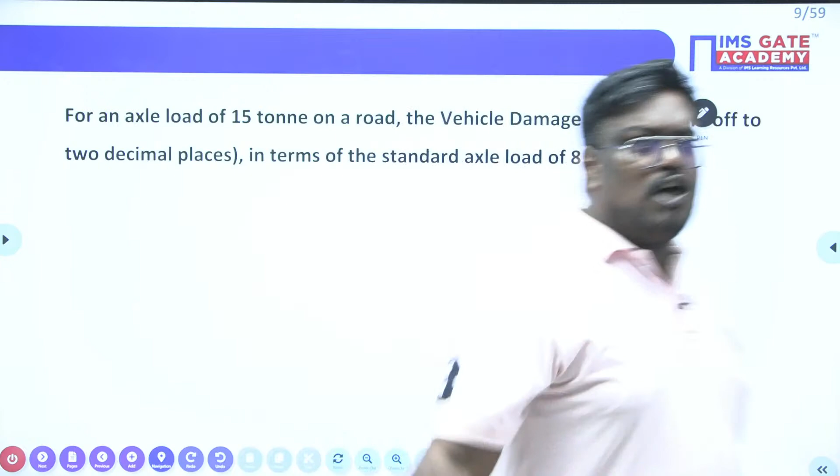Today's session will start with beautiful problems. Can you quickly read the question? For an axle load of 15 tons on a road, find the vehicle damage factor. This is regarding a vehicle's axle load, and they can ask you about this.

Good evening, sir. Nikhil sir is one of the good faculty, like Pragna sir is very good in fluid mechanics, and Nikhil Gaurav sir is very good in machines and measurements.

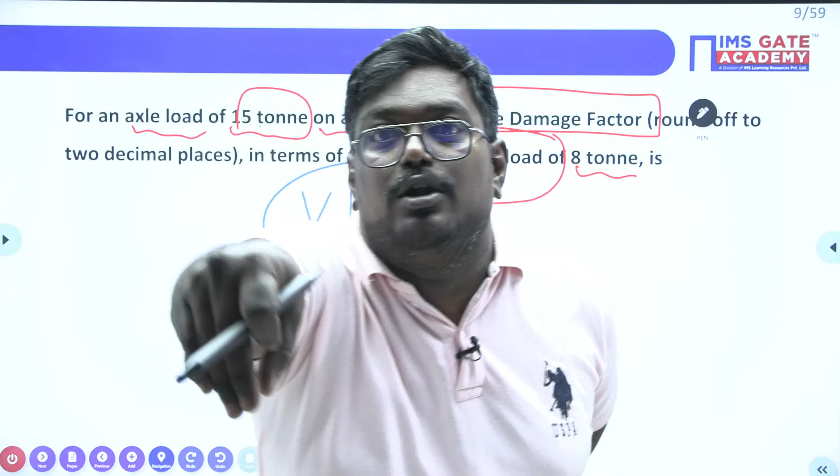Now we have VDF. What exactly is VDF? VDF is nothing but vehicle damage factor, in terms of a standard axle of 8 tons. You should understand what vehicle damage factor is: due to the axle load, how much it is going to impact the vehicle, that is the vehicle damage factor. It is evident from the question that the axle load is 15 tons.

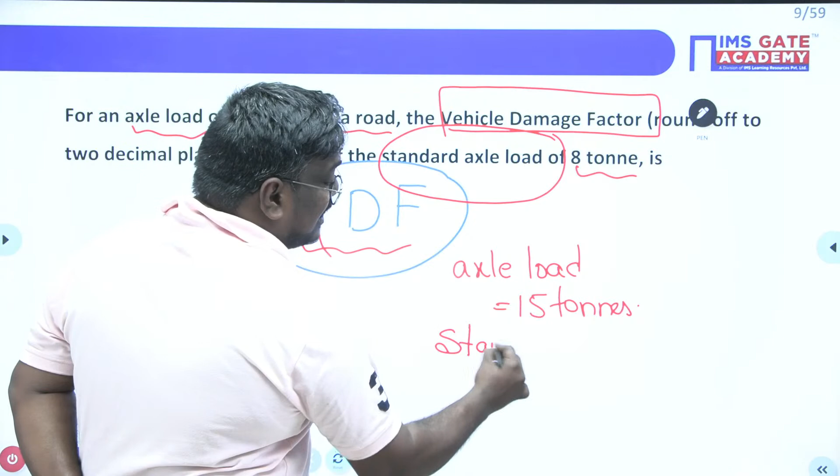Axle load is 15 tons. Now, my dear students, we also have a standard axle load. It is asking in terms of standard axle load, which is 8 tons. So, my dear students, it is asking the VDF. What is VDF? Vehicle damage factor. Very, very simple, my dear students. Can anyone tell me?

Thank you, Nikhil sir. Thank you.

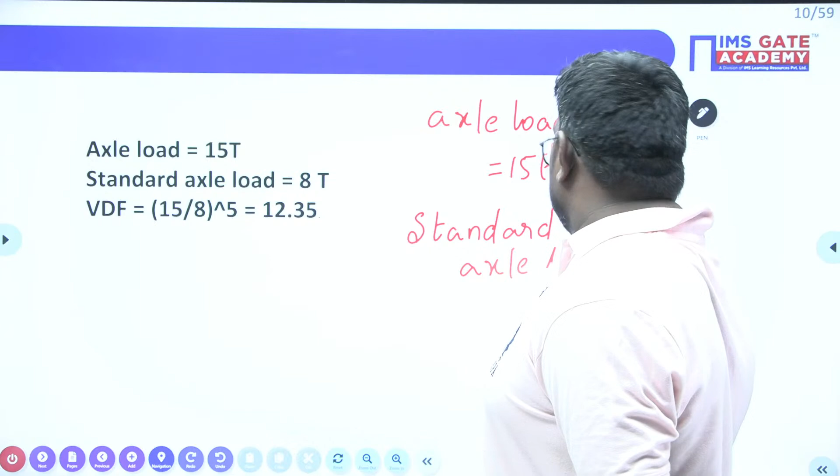Can anyone tell me, my dear students, what is vehicle damage factor? So, here it is clearly given, my dear students, axle load is how much? 15 tons. And what is the standard axle load, my dear students? Standard axle load is nothing but 8 tons. Now, my dear students, he is asking what is the vehicle damage factor?

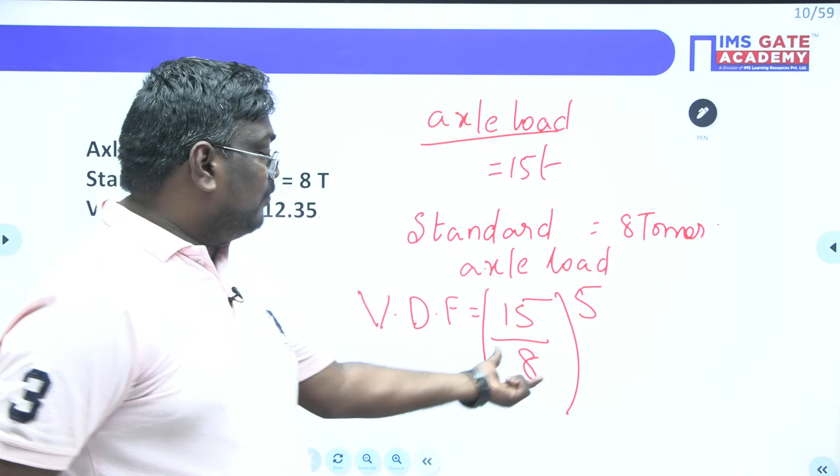Now, vehicle damage factor is given by the formula: axle load, 15 tons, divided by standard axle load, whole power 5. See, my dear students, what is the power? 15 by 8 whole power 5. It will be roughly 12.35. You have to remember that vehicle damage factor is nothing but axle load divided by the standard axle load whole power 5. That is a simple question, my dear students.

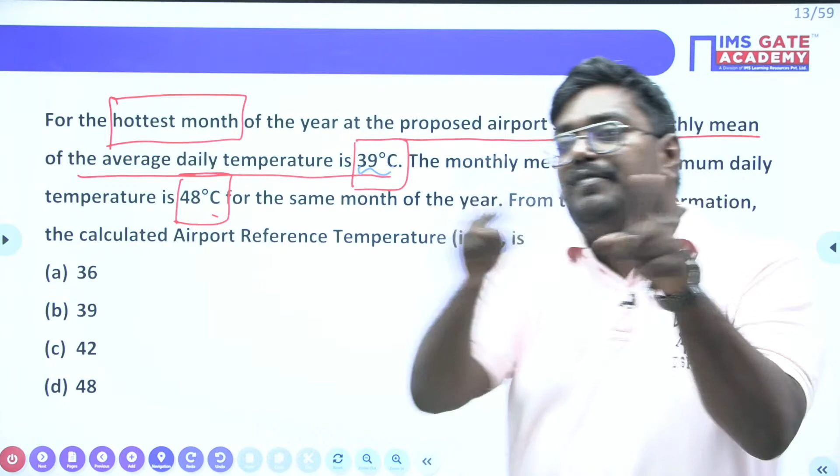He is saying monthly mean, so he is taking the average of the daily temperature, and on top of it the monthly mean. So he has given 39 degrees. The monthly mean of the maximum daily temperature, this is the maximum, my dear students. This is mean, and this is monthly mean of maximum. A lot of difference is there. One is maximum, another one is mean of average.

From the given information, what is the calculated airport reference temperature? Can anyone quickly answer me, my dear students? See here, I would like to tell you very important things. They want to understand what the reference temperature at the airport should be based on the mean of the monthly average temperatures and the mean of the monthly maximum temperatures.

Whenever they have done this kind of stuff, we have a beautiful formula. Please write down, my dear students. Airport reference temperature = Ta + (Tm - Ta)/3. Now you will ask me, sir, what is A? A is the mean of average daily temperature. Similarly, what is M? M is the maximum daily temperature. Is it clear, my dear students?

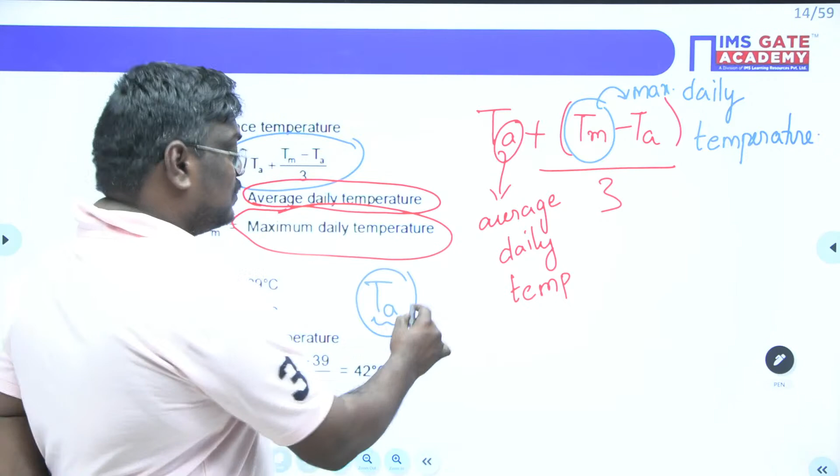So here, Ta is the average daily temperature and Tm is the maximum daily temperature. The formula is very important. How to remember? Maximum will always be more, so you cannot add maximum plus something. Take the average, find the difference between the maximum and average, divide by 3, and add it to get the airport reference temperature. You are taking the average plus the difference between maximum and average upon 3.

Here, average will be less. Average is 39, maximum is 48. So 39 plus (48 minus 39) upon 3. 48 minus 39 is 9, 9 upon 3 is 3. So it will be 42 degrees. Am I clear, my dear students? Chandu, are you there? The answer here is 42 degrees.

Is it clear? Again, I would like to tell you, airport reference temperature is average plus maximum minus average upon 3. Simple formula, you will secure 2 marks in the GATE exam, my dear students. So this is how you have to solve the problem.

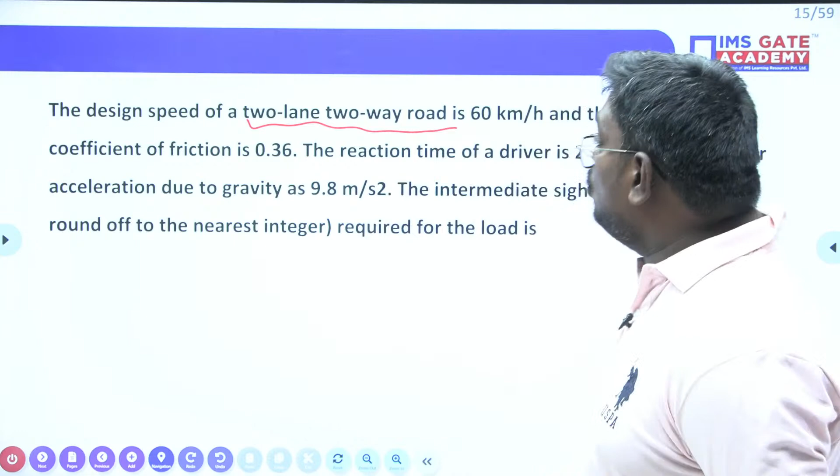Now, this is also a beautiful problem. The design speed of a 2-lane two-way road is 60 km per hour, and the longitudinal coefficient of friction is 0.36. The reaction time, I would like to tell you a very important thing. Remember, in case of stopping sight distance, the reaction time is 2.5 seconds. In case of stopping sight distance, the reaction time is how much? 2.5 seconds.

Am I correct, my dear students? If you can understand this, why I am telling, my dear students: luckily in the problem he has given it. If they ask you for OSD, what is the reaction time, my dear students? What is the reaction time? Anyone, my dear students, can you quickly answer?

It is 2 seconds. My dear students, I am telling you very frankly, to make the question tricky. These are the standard values as per IRC, Indian Roads Congress. You have to sometimes remember this value: 2.5 seconds in case of stopping sight distance and 2 seconds in case of overtaking sight distance. So, my dear students, the acceleration due to gravity is also 9.81 or 9.8 meter per second square.

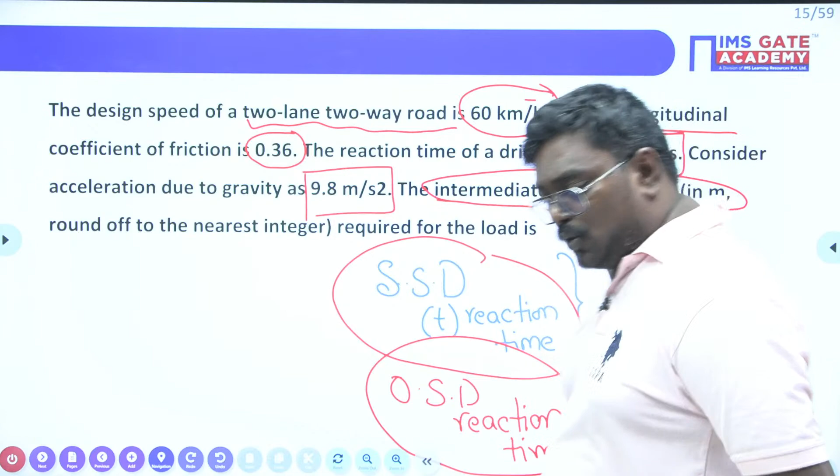Now, my dear students, he has asked what is the intermediate sight distance to the round off value. This is very important, my dear student. As I told you, stopping sight distance is defined as lag distance plus braking distance. What is BD? Braking distance. Am I clear, my dear students? Can you quickly answer me? Is this clear? Okay.

Okay. Suresh, now we have a question. They are asking, what is the intermediate sight distance? See, my dear students, here when they ask you whether it is a two-lane road or a one-way road, he is asking intermediate sight distance. So intermediate sight distance, you can write here, is equal to twice the stopping sight distance.

And remember, stopping sight distance can be taken as lag distance Vt plus V square upon 2gf. Okay? If gradient is given, plus or minus n is also added. So this is the formula for stopping sight distance. Is this clear? So one more thing I would like to add, my dear students. Here they have not asked SSD, they have asked ISD. So ISD is equal to twice the stopping sight distance.

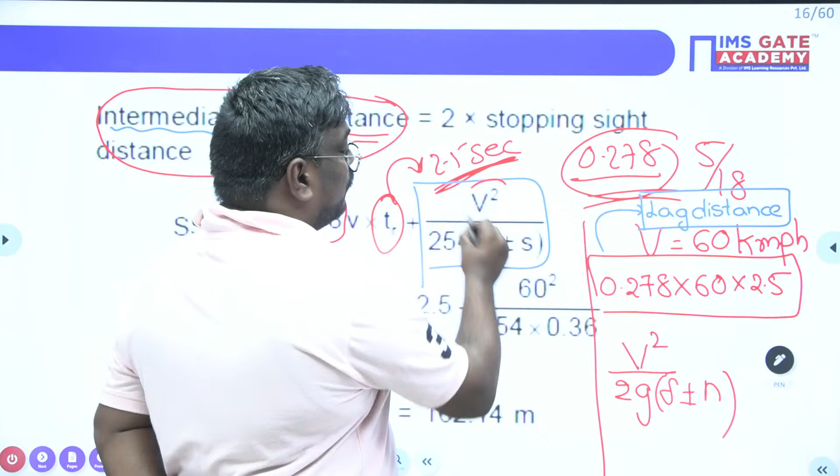Now, my dear students, we also have another term known as braking distance, and braking distance can be taken as V square by 2g(f plus or minus n). If they have not given any gradient, you can ignore n and take it as 0. Here braking distance is V square upon 2gf. So V square is 60 into 5 by 18 whole square, acceleration due to gravity is 9.8, multiplied by coefficient of friction 0.36, because n value is not given.

Similarly, if you calculate lag distance, that is V into t, that is 60 into 5 by 18 into time, which is 2.5 seconds. So when you add these two values, you will get the value of stopping sight distance. So what is the stopping sight distance we got?

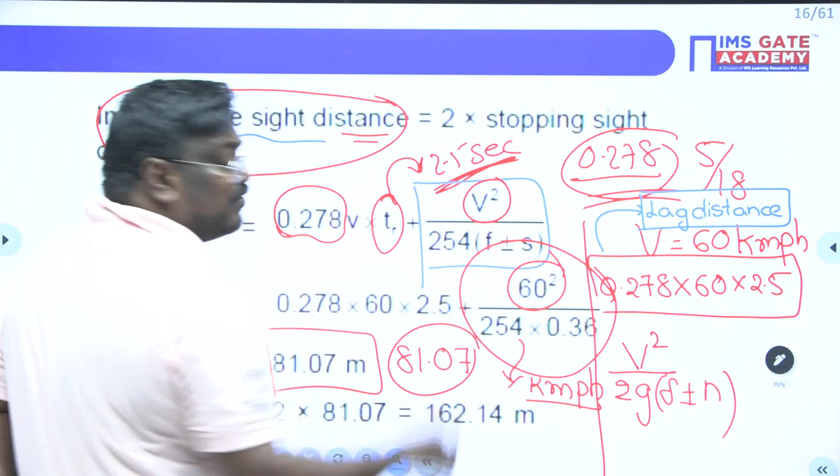Now you have got stopping sight distance is equal to 81.07 meter. Now in case of intermediate sight distance in a two-way road, it will be equal to twice the stopping sight distance, that is equal to 2 into 81.07 meter. It will be 162.14 meter. This is the answer. Any doubts, my dear students?

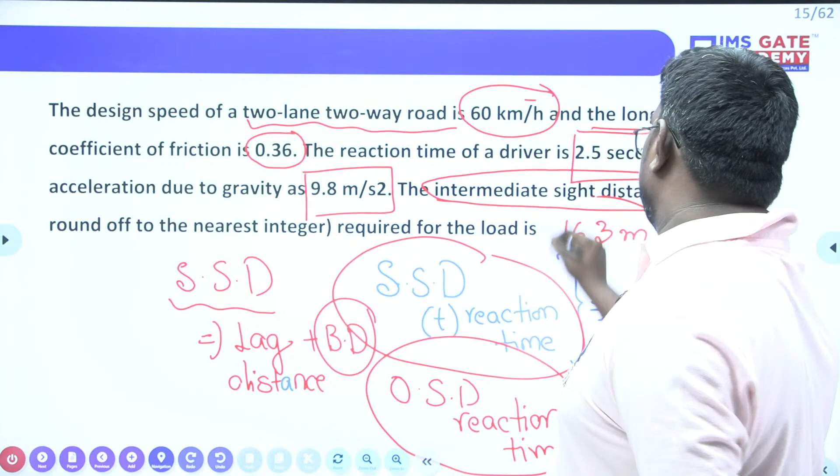Any doubts? So here, if they ask you, what is the intermediate sight distance? You can roughly write it as 163 meter. We are rounding off to the next answer, that is 163 meter. Any doubts, my dear students? Okay. Any doubts, my dear students, until now? Okay. I hope you have enjoyed the question.

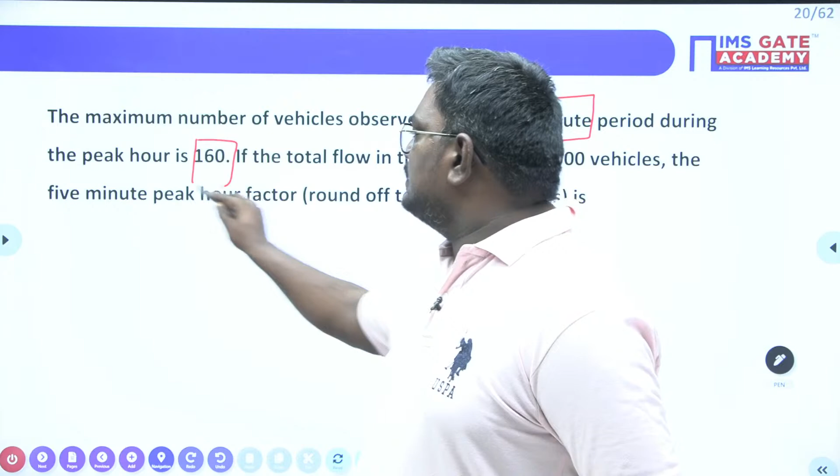Now, the maximum number of vehicles, please read the question, my dear student. It is something like an aptitude question, but makes sense. The maximum number of vehicles observed in a 5-minute period during the peak hour is 160. This is very important. What is given? He has given 5-minute period.

How much, my dear students? Here the maximum number of vehicles is given. The maximum number of vehicles for a 5-minute period at the peak hour is how much, my dear students? It is 160. Does it make sense, my dear students?

So in 1 hour, how many 5 minutes are there? How can you know? So in 1 hour, you will have 60 minutes. And if I divide it by the 5-minute peak, in an hour you will have 12 times 5. So the maximum number of vehicles for a 5-minute period at peak hour, for 1 hour, it will be 160 into 12. You can write it as 1920 vehicles.

Are you getting me? For the 5-minute period during the peak, the maximum vehicles are 160. For a 5-minute duration, he is telling the maximum number of vehicles is 160. So in 1 hour, how many 5 minutes are there? 12 5 minutes are there. So the total number of vehicles in 1 hour, if we calculate, will be 1920.

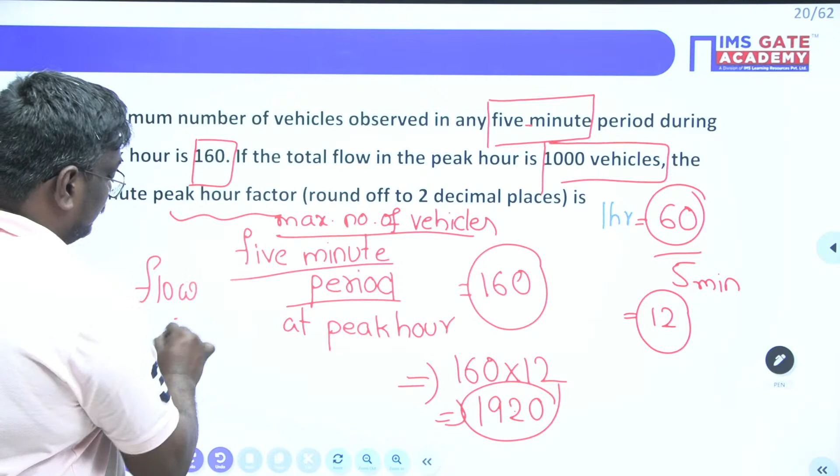If the total flow in the peak hour is 1000 vehicles, the 5-minute peak hour factor will be? The total flow here is how much, my dear students? The total flow is 1000. So he is asking, what is the 5-minute peak hour factor? So the 5-minute peak hour factor can be written as total flow divided by peak rate volume. Volume is nothing but flow.

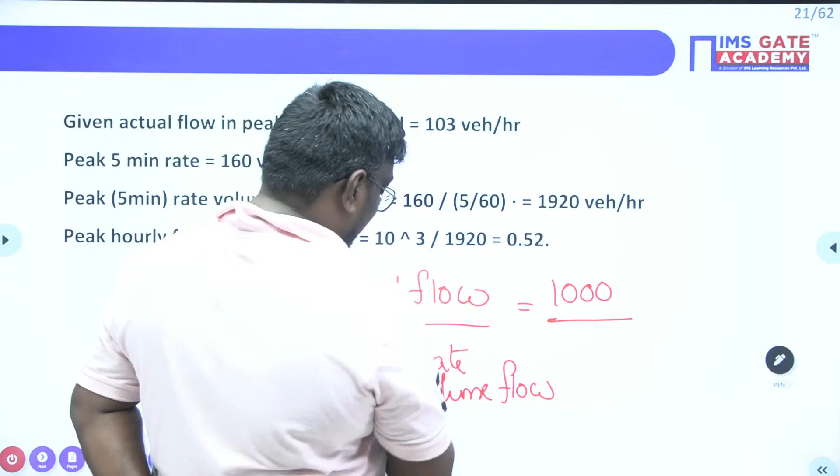So total flow is 1000 divided by peak rate flow, which you have calculated just now, that is 1920. You will get a value of 0.52. So what I want to tell you here, my dear students, the peak is nothing but the maximum. So maximum you are getting 1920 in an hour.

You are getting 1000. So 1000 will be what fraction of the peak? Peak factor means 1000, the flow of traffic, divided by, sorry, not peak hourly factor, the peak flow rate or peak volume you can say. So 1000 divided by the peak volume will be equal to 0.52. So the given actual flow is 1000 vehicles per hour.

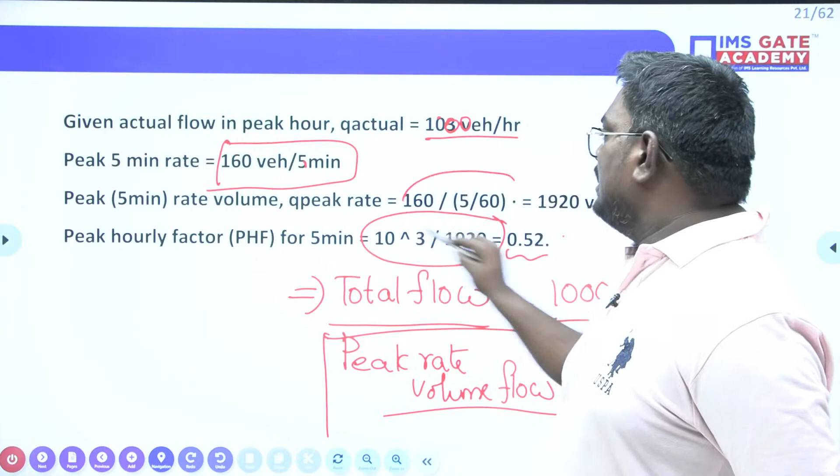Peak 5-minute rate is 160 vehicles for 5 minutes. If you calculate for 1 hour, it will be 160 into 12, that will be equal to 1920 vehicles. So the peak flow of traffic is 1920. So the peak hourly factor is 1000 flow upon the peak hourly 1920. If you do this, you will get a value of 0.5. So this is nothing but the peak hourly factor.

Is this clear, my dear students? I am going more and more on the traffic concept, because I sense there will be a question from traffic. So just go through that question for 1 minute. I'll give you 1 minute, my dear students. Just go through that question.

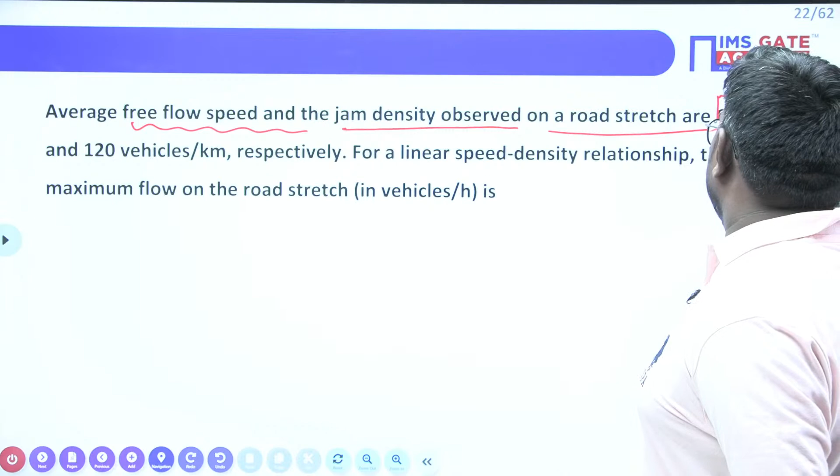Hello, my dear students. I hope you have understood this problem very clearly. The average free flow speed and the jam density observed on a road stretch are 60 km per hour and 120 vehicles per kilometer. For a linear speed-density relationship, this is very important, it has a lot of significance. That means if you see the variation between speed and density, the graph is linear.

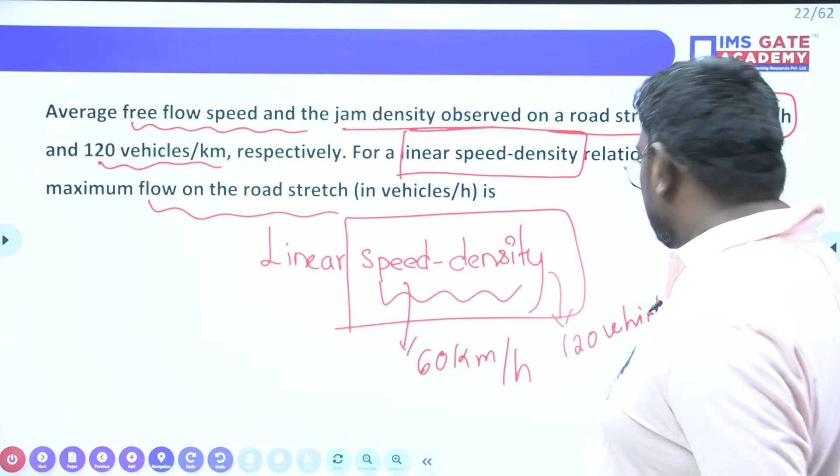So he is asking the maximum flow on the road stretch. They have given the speed as 60 km per hour and the density as 120 vehicles per kilometer. So we have a beautiful formula, that is Q is equal to KV. Traffic flow is defined as speed into traffic density. But he is asking the maximum flow. This is the formula for flow, not for maximum flow.

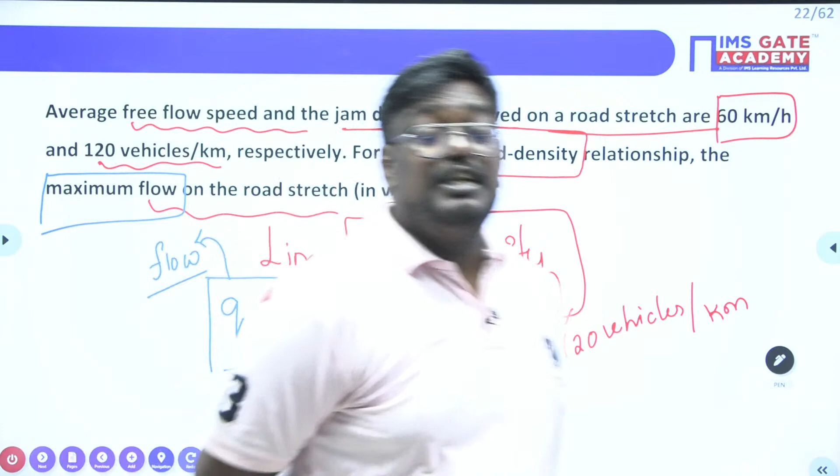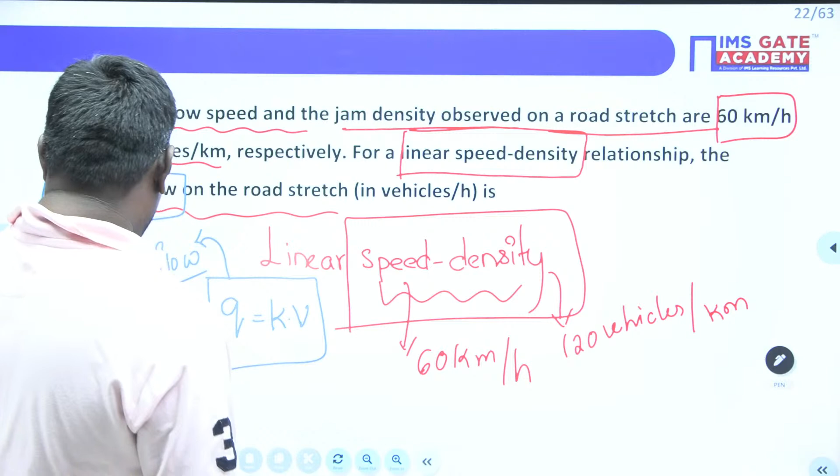So here you should understand the proper concept. What is the maximum speed? Maximum speed is given as 60 kilometer per hour. Similarly, another important thing is the maximum density, which is given as 120 vehicles per kilometer. Sorry, my dear student, because units are very important. So here it is 120 vehicles per kilometer.

In case of maximum flow, it will be taken as speed upon 2 into jam density by 2. You can simply remember this formula. In the coming problems, I will show you the graph also, how this formula came. So for now, the maximum flow is equal to 60 into 120 divided by 4. This is 15; 15 into 120 is 1800. Speed is kilometer per hour and density is vehicles per kilometer, so the flow will be vehicles per hour. So 1800 vehicles are moving in an hour.

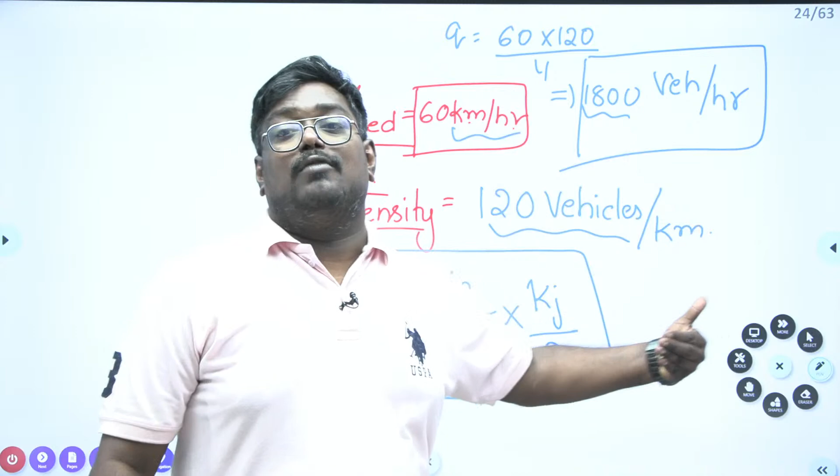This is a very important thing. Speed, everyone knows, is distance by time. Density means how many vehicles occupy a unit length of road, so there are 120 vehicles per kilometer. And flow is how many vehicles are going to flow on that road in an hour.

So the answer here is 1800 vehicles per hour. Is it clear? Again, the maximum flow is given by the formula Kj into Vf upon 4. That is jam density 120 into 60 upon 4, equal to 1800 vehicles per hour. This is the maximum flow. Flow is vehicles per hour, speed kilometer per hour, density vehicles per kilometer.

So in simple words, my dear students, if this is a road and you take a particular junction, in a particular period of time, how many vehicles are flowing, that is called flow. How many vehicles are there in this unit length, that is density. Density is vehicle per kilometer length, and flow is vehicle per time. And anyhow, you know about speed.

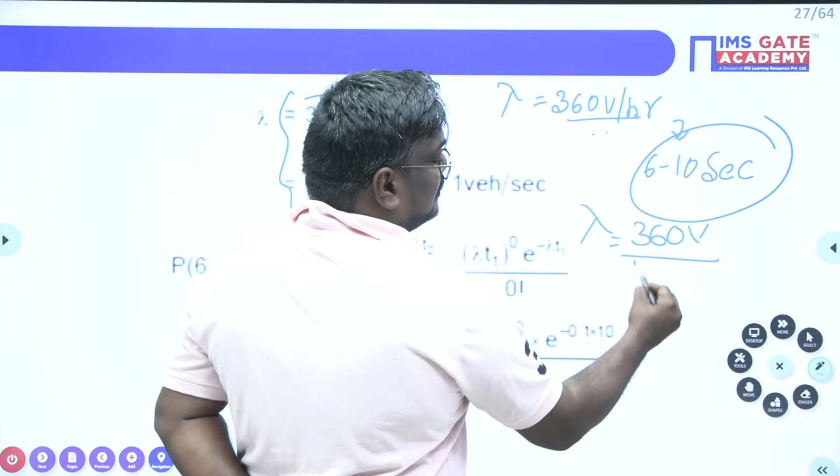But remember, he has asked the headway for 6 to 10 seconds. So since time is given in seconds, I will convert 360 vehicles per hour into vehicles per second. That means divided by 3600, since 1 hour is 3600 seconds.

So here lambda will be equal to 1 by 10, that is 0.1. So if anyone asks you what is the lambda value, lambda is 0.1. How did you get lambda 0.1, my dear students? He has given the vehicle lambda as 360 vehicles per hour. We have just converted it into seconds, since 1 hour is 3600 seconds.

Now, my dear students, here is the problem. The probability distribution is given for 6 to 10 seconds - it is clearly given as 6 to 10 seconds. Now the formula comes into picture. We have a formula, my dear students.

Lambda T2 power 0, you can write here, lambda T2 power 0, e power minus lambda T2 upon 0 factorial, and lambda T1 power 0, e power minus lambda T1. Why? You should understand one thing - you are taking from 6 to 10 seconds. Here T2 will be 6 seconds and T1 will be 10 seconds.

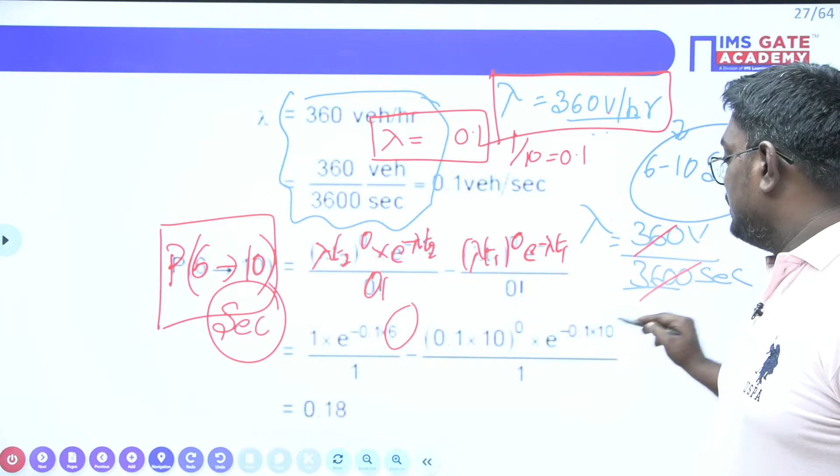If you solve this, you already know lambda, my dear students - lambda you have already calculated is 0.1. Multiplied by lambda T2, T2 is 6 seconds. You can write 6 also: 0.1 into 6, into e power minus 0.1 lambda T2.

Are you getting me, my dear students? Let me write this equation: lambda T2 power 0, e minus lambda T2 upon 0 factorial, minus lambda T1 power 0, e power minus lambda T1 upon 0 factorial. Here lambda is very evident - it is 0.1 into T2 which is 6 seconds, e power minus 0.1 into 6, divided by 0 factorial.

This is how you got this formula - this is a Poisson's distribution. Minus of lambda, 0.1 into T1, T1 is 10 seconds, divided by 0 factorial. E power minus lambda is 0.1 into T1 which is 10.

On solving this, you will get a value of around 0.18. So the probability of successive headway between vehicles lying between 6 and 10 seconds is 0.18. Is this clear, my dear students?

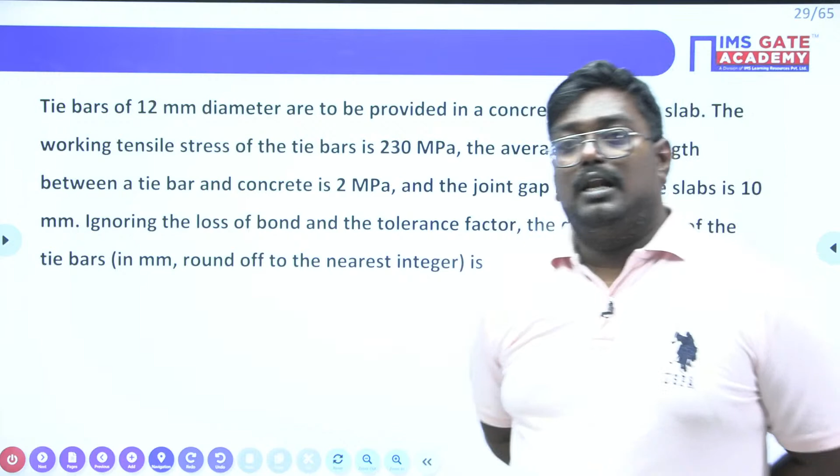Now we have another important question, Amma. Please read that question - I'll give you 1 minute to study the question clearly. Please read the question carefully, my dear students.

Students, have you read the question? Okay, now this is a kind of rigid pavement, my dear students.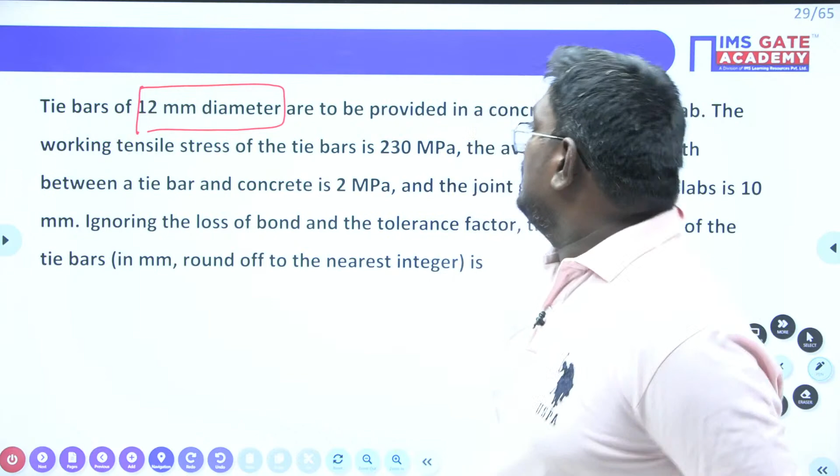Actually, there is a lot of concept related to development length and also related to the RCC part here. There is a tie bar of 12 mm dia to be provided in a concrete pavement slab.

The working tensile stress of the bar is 230 MPa. This is the working stress, you can write working tensile stress, or some people write it as sigma st.

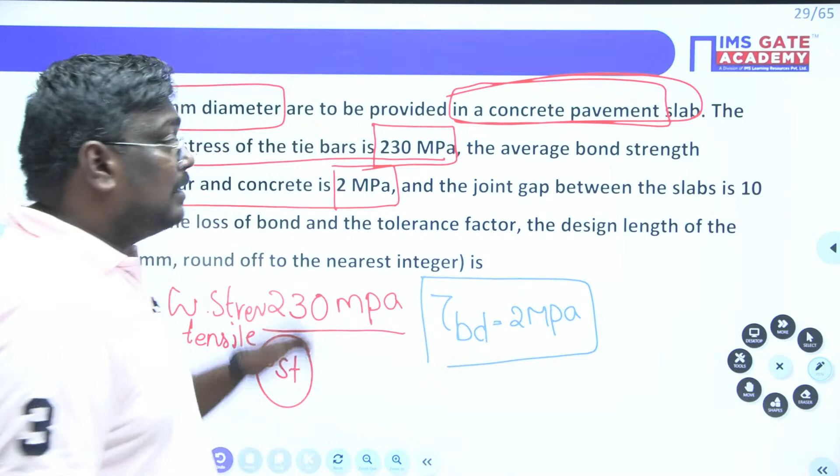The average bond between tie bar and concrete is 2 MPa. Bond stress is nothing but the shear stress. So here he has clearly given tau BD is equal to 2 MPa. Am I clear?

And the joint gap between the slabs, my dear students? 10 mm. The joint gap between the slab is 10 mm. So he is asking, ignore the loss of bond and the tolerance factor, the design length of the tie bars is... see, what do you mean by bond length, or you can write development length?

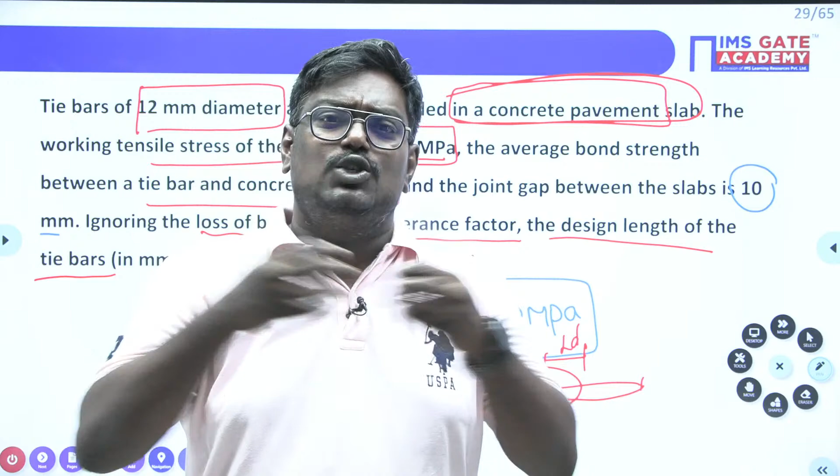If you have a bar extended here, what should be the length so that it can stiffly hold the concrete? How much should the bar be extended to stiffly hold the concrete? If you provide good development length, you can avoid the bar getting loose, or you can improve the gripping through the development length.

Now, I would like to tell you one important thing, my dear students. Development length is clearly given as 5... development length is equal to sigma st times phi upon 4 tau BD.

Here you can take this as tensile stress. Tau BD is the bond stress, and phi is the dia of the bar.

So here, if you see this problem, he has clearly given the tensile stress as 230 and the dia of bar is 12 mm. So you can write development length is equal to 12 mm into 230 Newton per mm square upon 4 into tau BD, which is 2 MPa, that is 2 Newton per mm square.

If you solve this, it will be around how much, students? It will come to around 345 mm. Am I correct or wrong? It will be around 345 mm.

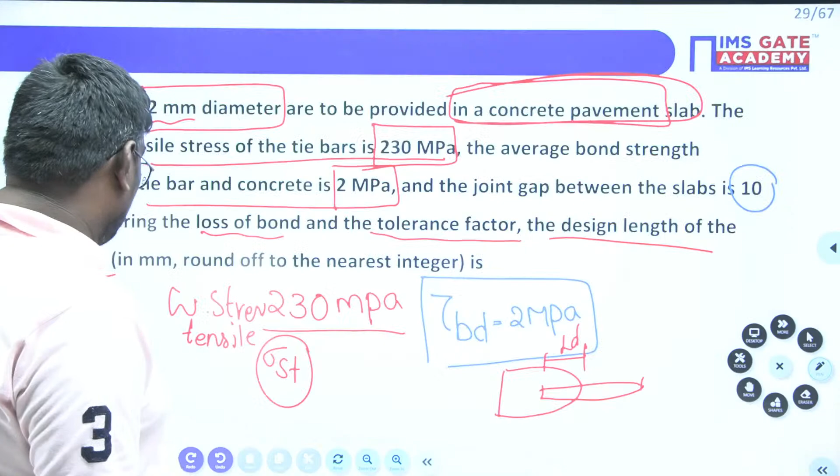But remember, he is asking about development length on the concrete slab - here you have this development length, and here also you'll have it. But again, they have given another point: the joint gap between the slabs is 10 mm, my dear students. Is it clear? So what is the design length?

If they ask you, design length is equal to LD plus spacing plus LD, two times. So here, 345 plus 10 plus 345, so 690, it will be around 700 mm. It will be 700 mm. Is it clear, my dear students? I hope you are clear.

Here you should understand: development length plus spacing plus again development length. Spacing is given as 10 mm. Is this clear, my dear students? Can you quickly answer me?

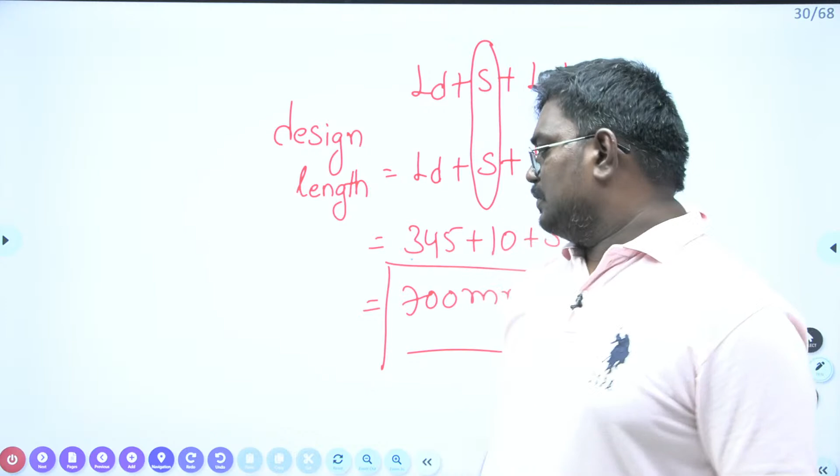Now please read this question, my dear students.

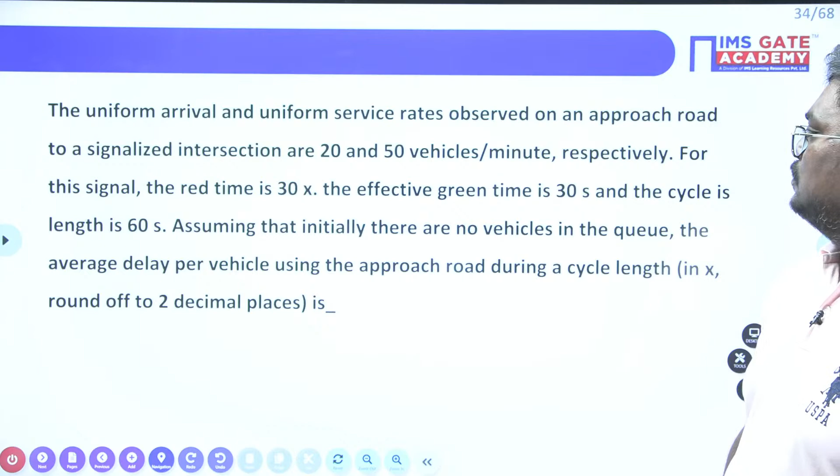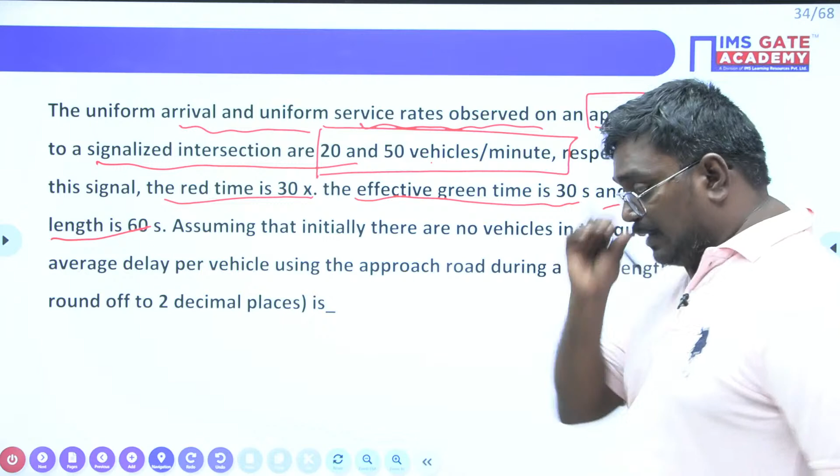Now let me read the question. The uniform arrival and uniform service rates observed on an approach road to a signalized intersection are 20 and 50 vehicles per minute respectively. For this signal, the red time is 30 seconds, the effective green time is 30 seconds, and the cycle length is 60 seconds. He has given effective red time, effective green time, and also cycle length.

Assuming - what is cycle? The time gap between the red and the green will be taken as cycle length. Assume that initially there are no vehicles in the queue. The average delay per vehicle using the approach road during a cycle length - so he is asking what is the average delay per vehicle.

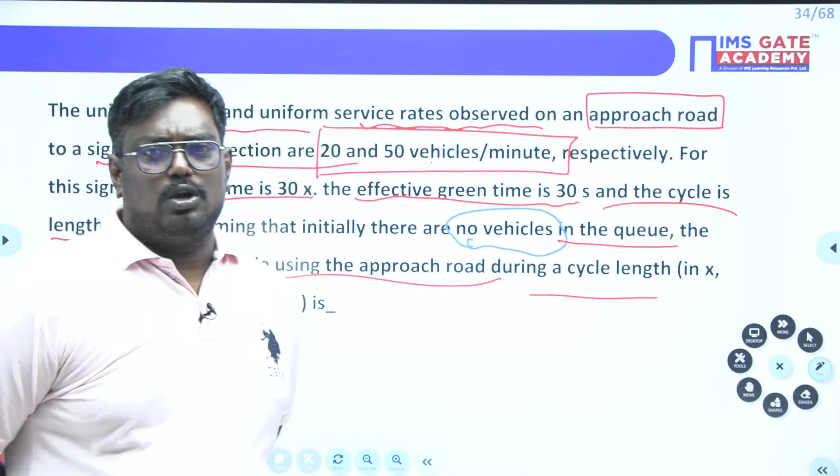You should understand the average delay per vehicle using the approach road during the cycle length. They have given you green time, effective red time and cycle length, and also that there are no vehicles in the queue. They are asking for the average delay per vehicle using the approach road.

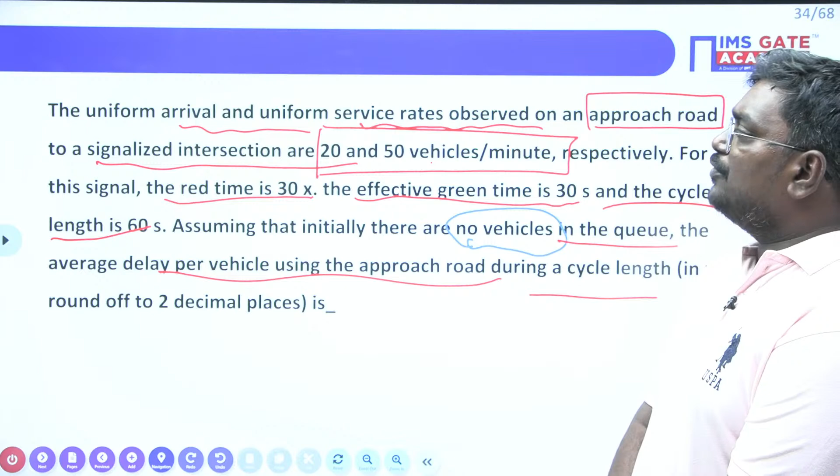He has given uniform arrival and uniform service rates observed for a signal intersection: 20 vehicles per minute and 50 vehicles per minute. So here they have given you the flow.

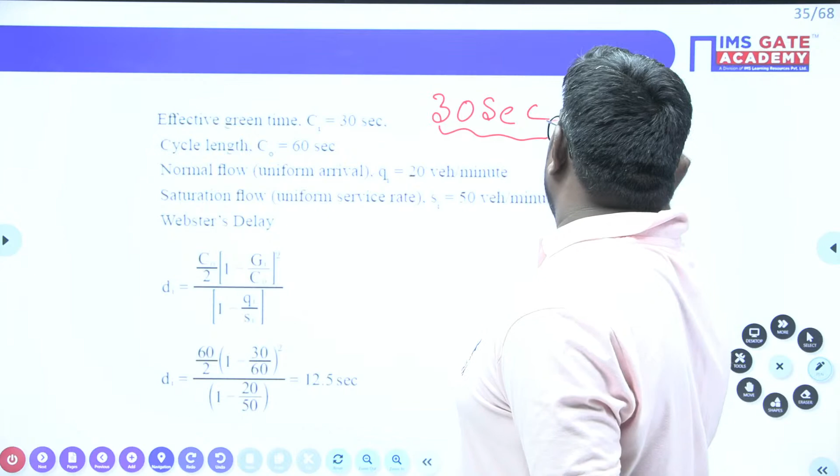The effective green time is given as 30 seconds, represented as Gi. Similarly, the cycle length is given as 60 seconds.

Under normal conditions, the flow of traffic is 20 vehicles per minute. Uniform flow or uniform service rate is nothing but saturation flow, which is 50 vehicles per minute. So normal flow is 20 vehicles per minute and saturation flow is 50 vehicles per minute.

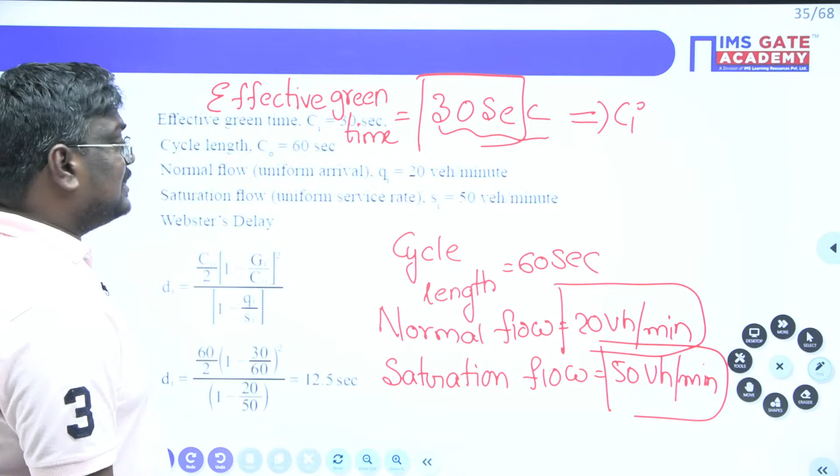Now he is asking what is the delay. C naught is nothing but the cycle length, written as C naught. So here you can write the formula: di is equal to C naught by 2, into 1 minus Gi by C naught whole square, upon 1 minus Qi upon Si.

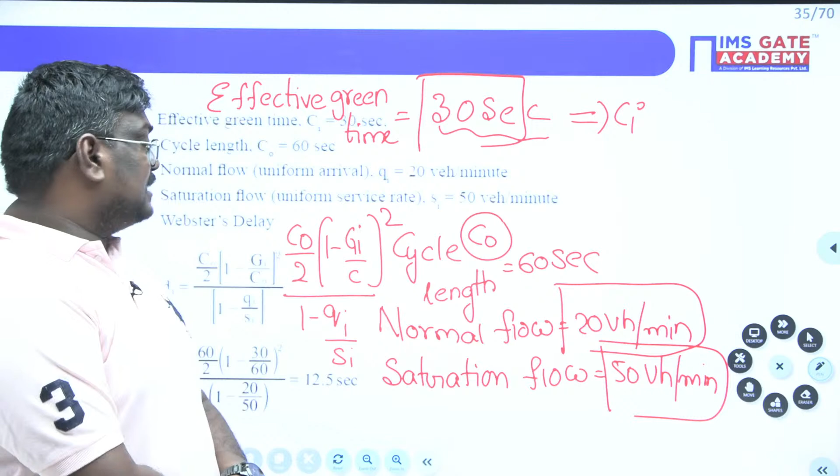What is Qi upon Si? Qi is nothing but normal flow, Si is nothing but the saturation flow. So you can write: C naught by 2 into 1 minus Gi by C naught whole square, upon 1 minus Qi upon Si. This is the delay formula which I have written.

Here delay is given by the formula C naught by 2 into 1 minus Gi upon C naught whole square, by 1 minus Qi upon Si. What is Qi? What is Si?

Si is nothing but saturation flow. Qi is nothing but normal flow. Gi is the effective green time. C naught is the cycle length. So here the delay formula, di is equal to, the cycle length is 60 seconds.

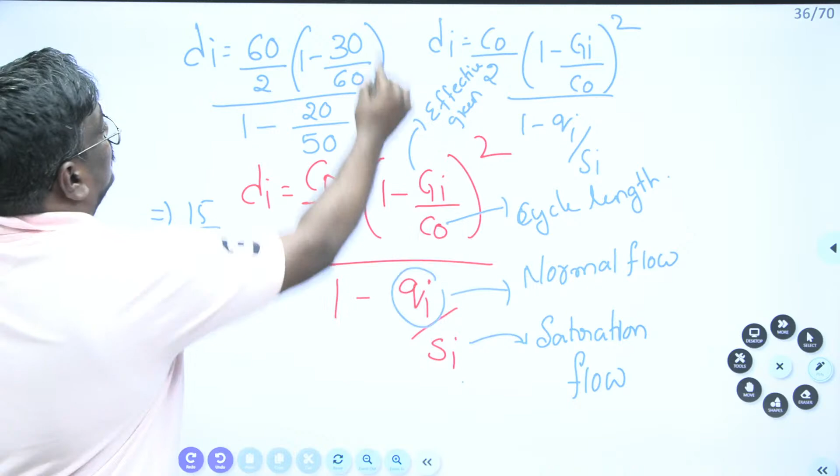So you can say the delay is... sorry, whole square is there. Here whole square is there, so actually it will be a small error, one second.

So here, sorry my dear students, if I take delay is equal to 30 into 0.25, because it's 0.5 square, here also square is there, upon 1 minus 20 by 50. Okay, 1 minus 20 by 50, this value will be how much, my dear students? 30 into 0.25 will be equal to 7.5, divided by 0.6. So you will get a value of 12.5 seconds. So if they ask you what is the delay, it is nothing but 12.5 seconds.

One second, my dear students, I will clearly explain you. The formula is di is equal to C naught by 2 into (1 minus Gi upon C naught) whole square upon 1 minus Qi upon Si. What is Qi, my dear students? Qi is nothing but the normal flow. Si is nothing but the saturation flow. And Gi is known as the effective green time. And C naught is nothing but the cycle length.

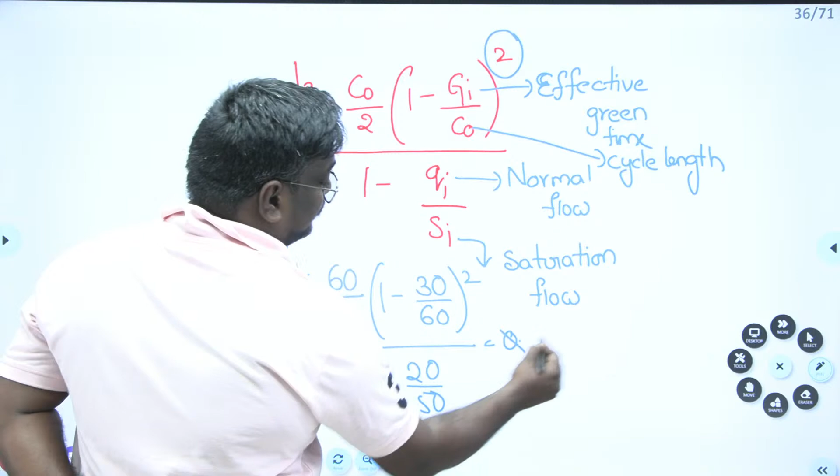So please remember, my dear students, if by mistake you forget these two, the entire problem will be wrong. So here di is taken as cycle length 60 by 2, into 1 minus 30 by 60 whole square, upon 1 minus 20 by 50, which I told you gives 7.5. One second, students. That will be equal to 7.5 divided by 0.6, which is 12.5 seconds. Any doubts, my dear students? So you have to remember the delay formula, this one. Clear?

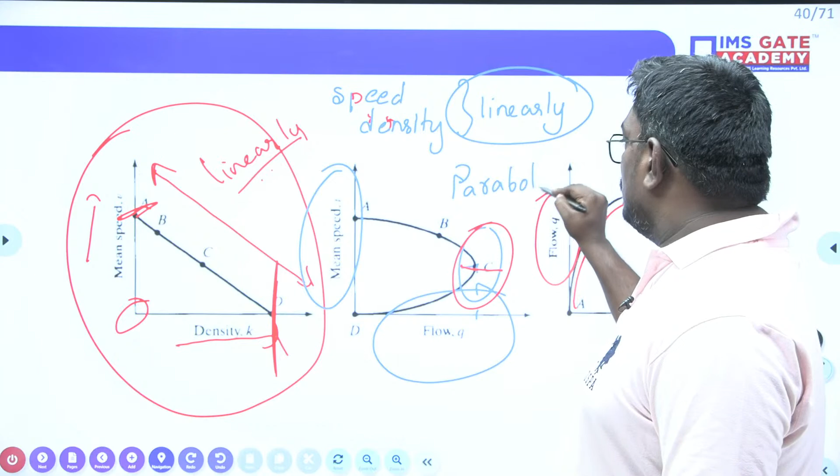Now, my dear students, I have a very important question for you. Here it is varying linearly, here it is varying parabolically, and here also the graph is varying parabolically. Am I correct or wrong? The speed and density vary in a linear way. The speed and flow vary parabolically. And the flow and density vary as a parabola.

Now here I have a question for you, my dear students. Can you quickly answer me? I want a very important point. If the speed is maximum, the flow is zero. If the mean speed is half, then the flow is maximum. So these kinds of observations are required. When the speed is zero, density is maximum. Speed half, flow maximum. So please write down these points, my dear students: when speed is 0, density is max.

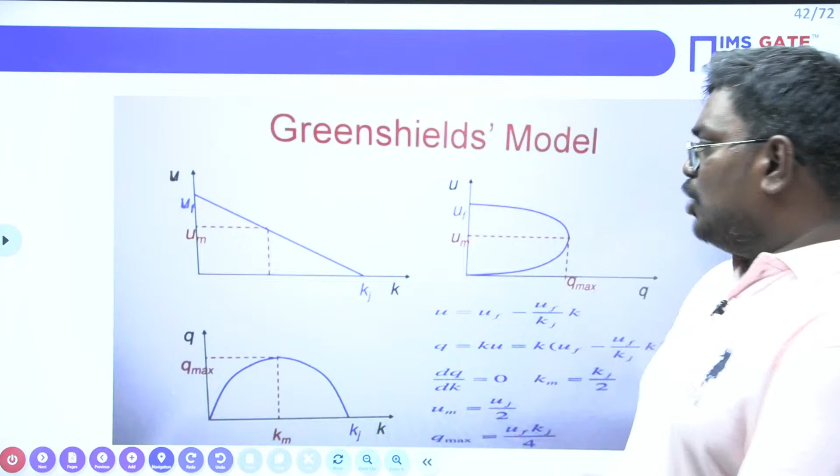Now, this theory I would like to tell you more importantly. This we call the Greenshields model. Here, if I take the mean speed as Uf, and if I take K maximum density as jam density, the flow is maximum. So, for this, according to this linear method, we have given an equation.

U is equal to free mean speed UF minus UF upon Kj into K. This is the basic equation for speed. How you got it, my dear students? If you see the graph here, by means of basic interpolation. The speed is going to reduce by part. Initially it is at UF. How much is it going to reduce? That is UF, and at that place there will be some K value divided by maximum jam density.

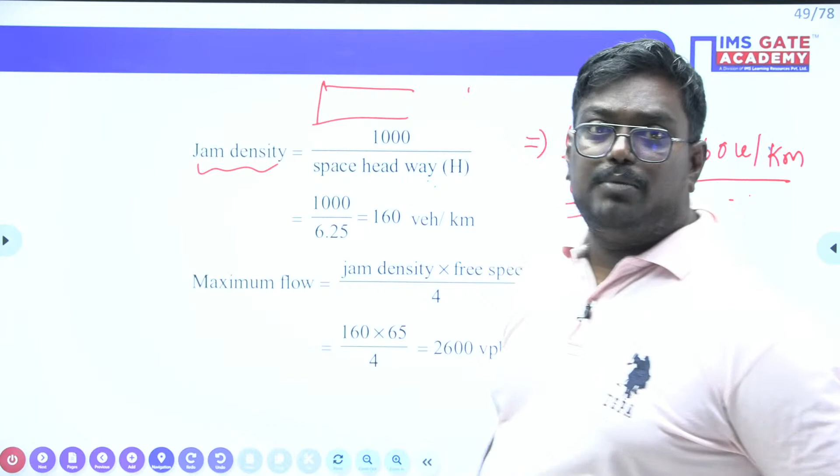Now, what is the maximum flow? Maximum flow is nothing but jam density by 2 into free speed by 2. 2 twos are 4. Here jam density is 160 and free speed is 65, divided by 4. So this will be 40 into 65, which is 2600, and the answer is A.

Now see, students, here the free speed is given as 65 km per hour. And space headway is given as how much, my dear students? 6.25 meters. Now, jam density is equal to 1000 divided by space headway, which is 1000 upon 6.25. If you solve this, you will get a value of 160.

Clearly, the free speed is 65. Just now I derived that q max is equal to half of jam density into half of free speed. Jam density 160 by 2 is 80, and free speed 65 by 2 is 32.5, so you will get 2600 vehicles per hour. Density is vehicles per kilometer and speed is kilometers per hour, so kilometer cancels and you get vehicles per hour. Is this clear for everyone, my dear students? Okay.

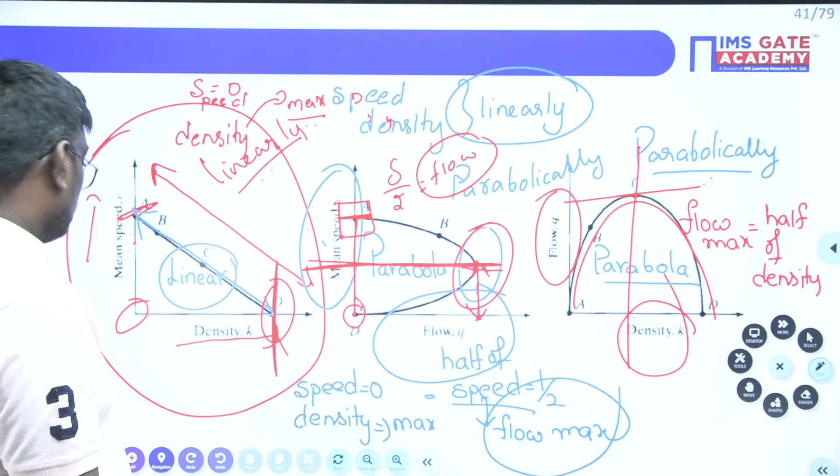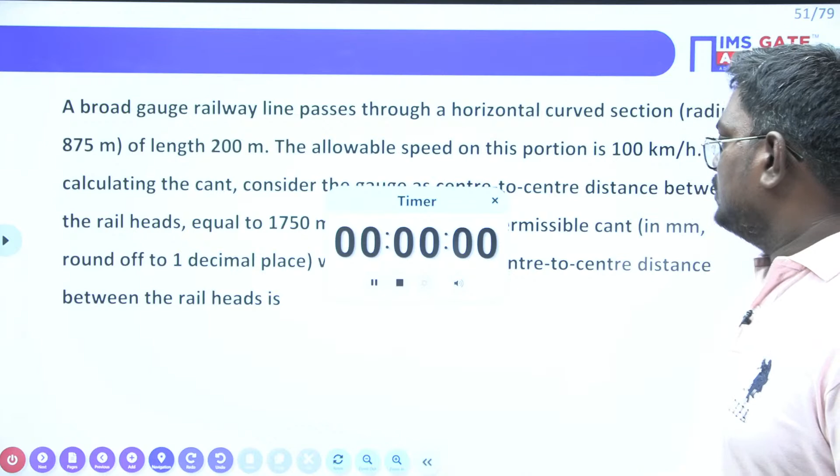I will give you 1 minute of time, my dear students. Okay, please read that question. And I want you to please comment. Please read that problem and anyone, can you please try? I'll give you 1 minute of time.

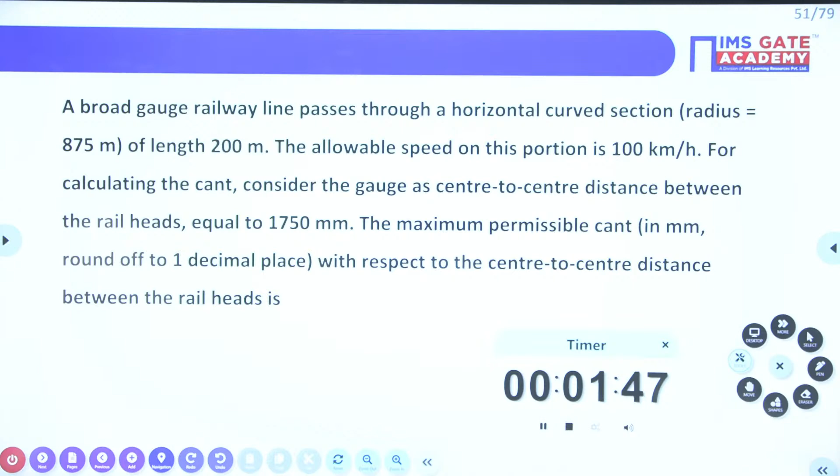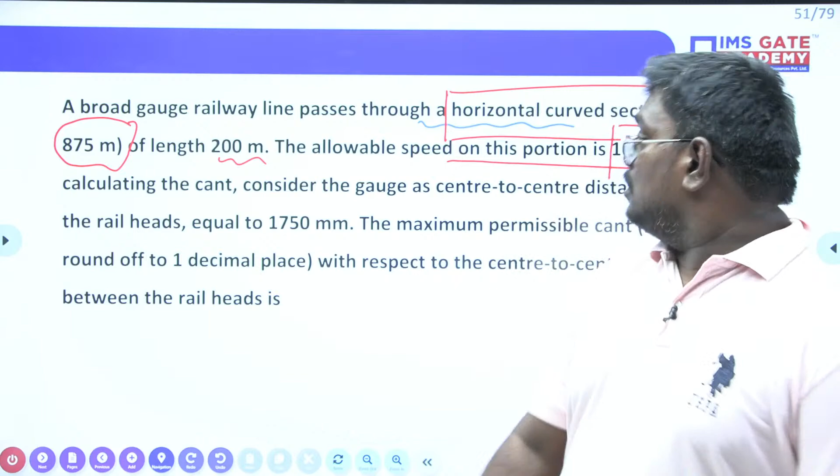You have a question here. A broad gauge railway line passes through a horizontal curved section of radius 875 meter, of length 200 meter. Allowable speed on this portion is 100 kilometer per hour.

For calculating the cant, consider the gauge as center to center distance between the rail heads equal to 1750 mm. The maximum permissible cant in mm, round off to 1 decimal place, with respect to the center to center distance between the rail heads is? He is asking indirectly the cant, which means it is nothing but banking or super elevation. Is it clear, my dear students?

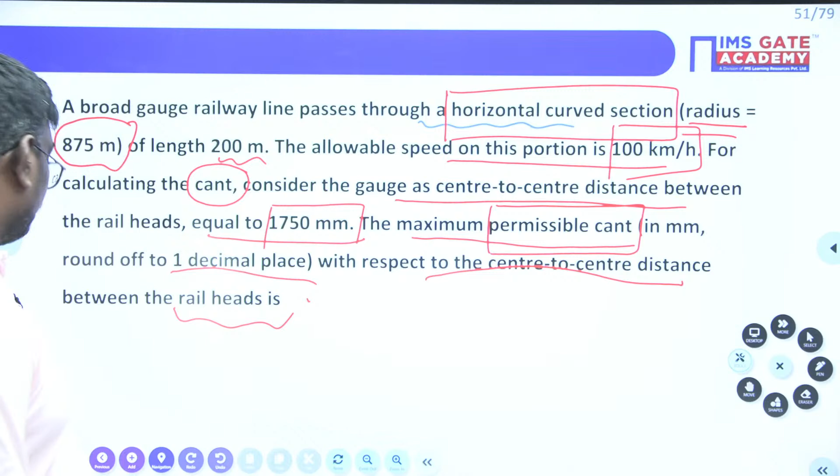So they have given you clearly, my dear students, the radius is 875 m. And the allowable speed is 100 kilometer per hour. And they also have given you the gauge length, that is 1750 mm.

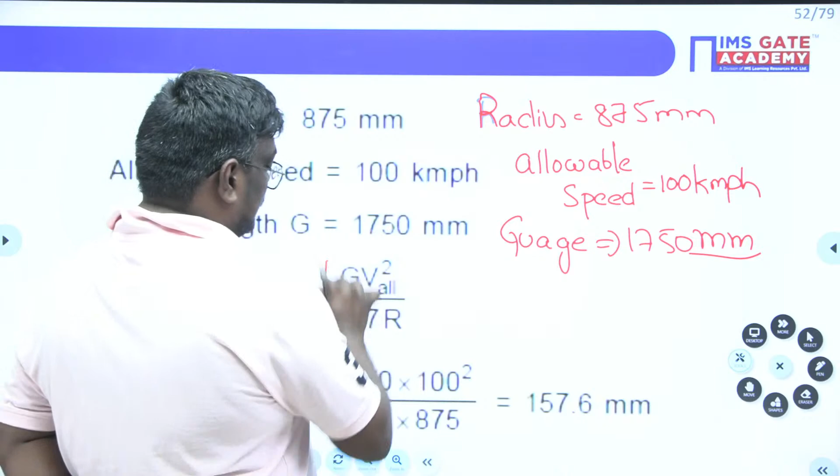Okay. It is because it's a broad gauge. So the length is standard. Broad gauge means the length is 1750 mm or 1.75 meter. Now, what is the allowable cant? Allowable cant is given by the formula G V square upon 127R.

So here I will tell you very simply, my dear students. Actually, when you talk about cant or e, we also know that it is V square upon 127R. But in railways, we talk about different gauges, no? So here G will come into picture, because it is G V square by 127R. And here V is always in kilometer per hour when it is 127. So G is 1750 mm.

V square is how much, my dear students? How much have they given? 100. So 1750 into 100 square upon 127 into 875. 1750 by 875 is 2, my dear students. Okay. So 2 into 10,000, 20,000 divided by 127. What is the value? It will be equal to almost

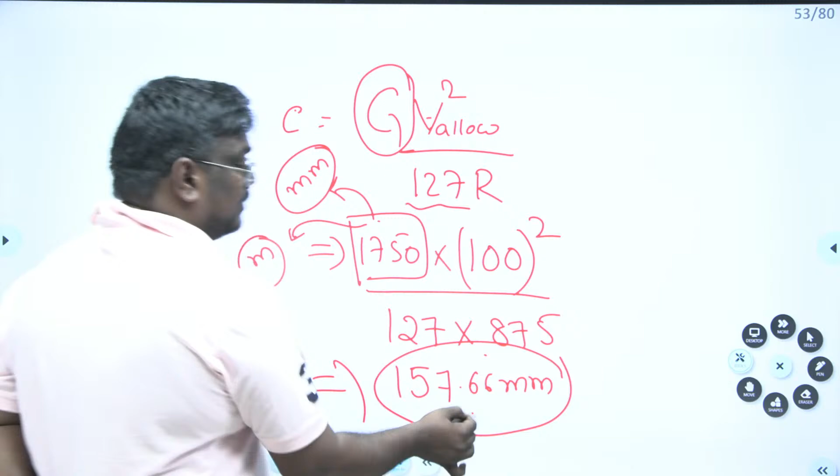157.48 mm. And remember, my dear students, whatever the gauge you have taken here, if it is mm, you will get the answer in mm. If you have taken the gauge distance in meter, you will get the answer in meter. Why? Because if you talk about the cant, usually it is a ratio, it is a slope, so it doesn't have units and it takes the units of the gauge only into consideration. Is it clear, my dear students?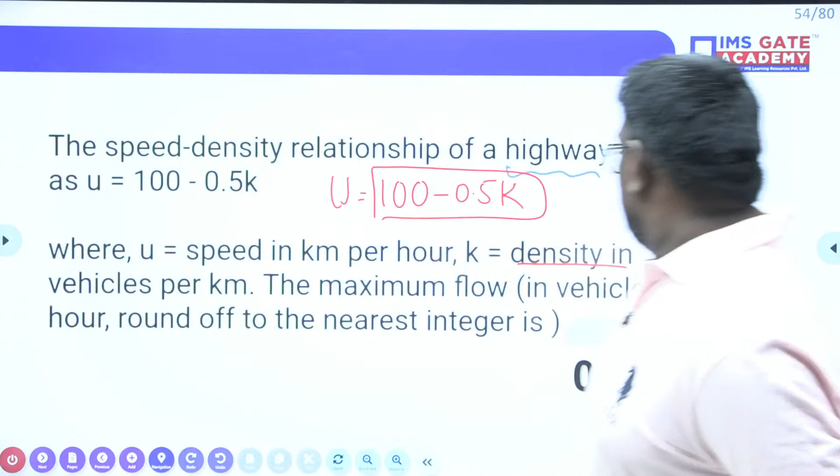Is this clear, my dear students? I hope 1 minute is sufficient to read the question and to get an idea. The speed density relation of a highway is given by the formula U equals 100 minus 0.5K, where U is the speed in kilometer per hour, K is the density in vehicles per kilometer, and what is the maximum flow? The maximum flow is being asked.

So here, my dear students, U is given by the equation 100 minus 0.5K, right? Recall one important relation. The mean speed is given by the formula U equals Uf minus K into Uf upon Kj. Are you getting me? From this equation, Uf, the free flow speed, is taken as 100. Now, my dear students, here you have 0.5K. So Uf by Kj is equal to 0.5.

Are you getting, my dear students? From this, UF is 100. 100 divided by 0.5 is equal to Kj. Now from this, jam density is equal to 200. See, my dear students, if you can understand the formula and derivation, this problem is nothing.

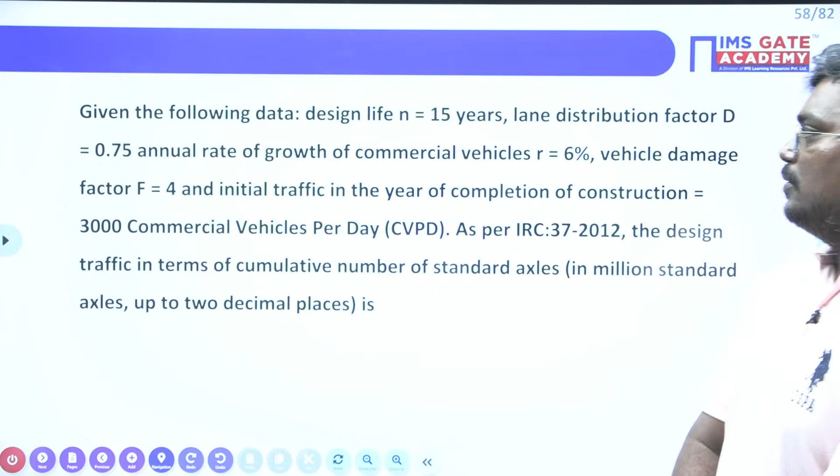Now read this question carefully, my dear students. Now, see students, I will read the question for you. Given the following data, design life N is 15 years. Lane distribution factor, we call LDF, is 0.75. And annual rate of growth of commercial vehicles is 6%.

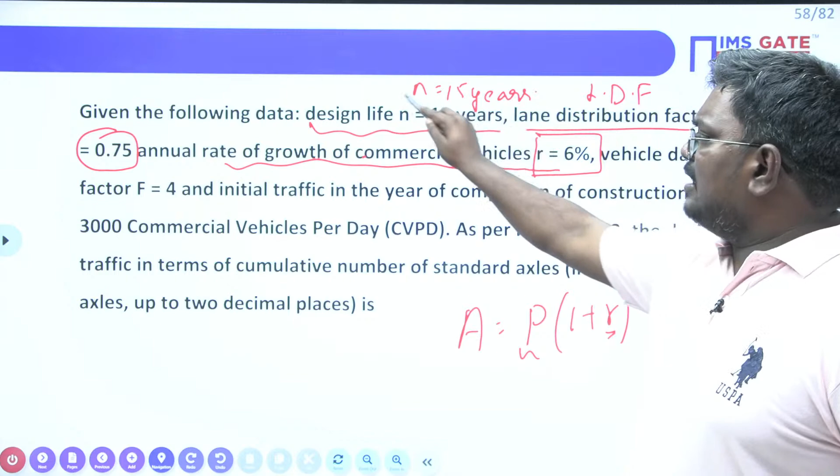Now, my dear students, in compound interest we have a formula called P into 1 plus R power n, where R is the rate of interest and P is the principal amount. They have given the life, that is 15 years, they will give you initially how many vehicles, and how much it is going to increase, that is 6%. Vehicle damage factor is also given as 4.

Initial traffic is given. Initial means P, like we can take principal amount here. The initial traffic is 3000 commercial vehicles per day. Are you following, my dear students? As per Indian Roads Congress Code, the design traffic in terms of cumulative number of standard axles is asked in million standard axles.

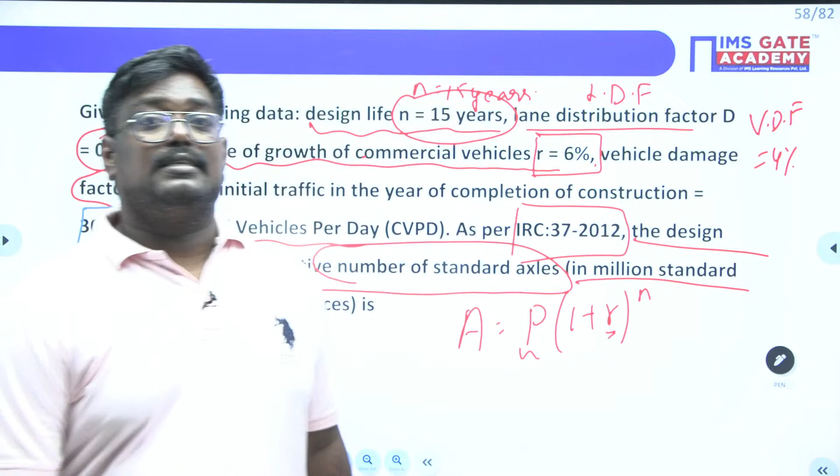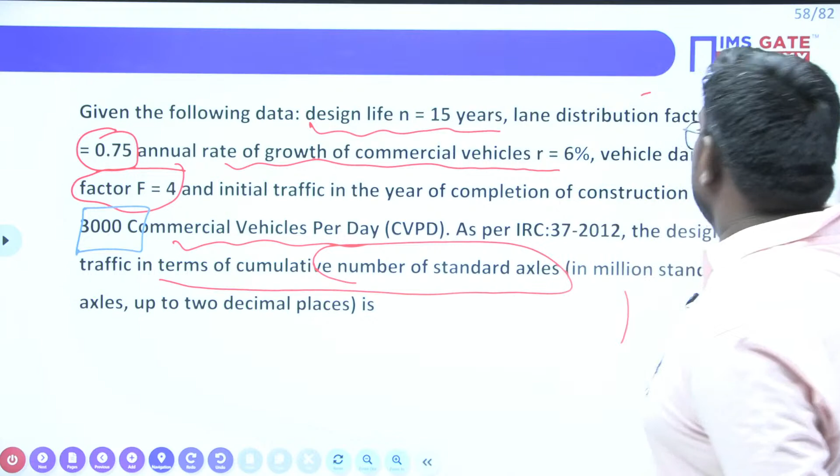Is this question clear for everyone, my dear students? Just see the important terms here. Vehicle damage factor is there, lane distribution factor is there, and also the principal. Initially 3000 vehicles and they are increasing at 6%. So from these, how to find out the cumulative number of vehicles?

See, I told you amount is equal to what? Simple concept. When I talk about amount, it is equal to principal into 1 plus rate of interest power n. This is what amount will tell you.

Now see, students, number of standard axles is 365A. That means 365 days into A, the amount, which he has given as 3000, you can take it as P. Into 1 plus R by 100, since percentage is given, power n minus 1, into vehicle damage factor and lane distribution factor.

Now, my dear students, multiply into 10 power minus 6, since he has asked the answer in million standard axles. Million means 10 power 6. So we are calculating million, and here it is 365 because it's per year, and A means initial, using the 1 plus rate of interest formula. I usually tell students it's R by 100, that is 6%, which itself will be given as rate of interest.

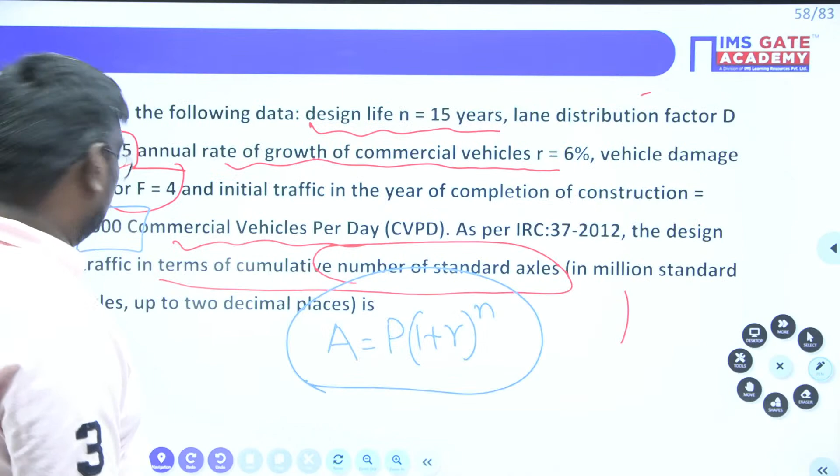Remember, A or P, 365 means number of days, into 1 plus R by 100 power n. See, 1 plus R by 100 minus 1, that is common, upon R percentile, or R by 100, into vehicle damage factor into lane distribution factor. In this way you will calculate the total number of axles.

Remember, you multiply with 10 power minus 6 because the problem clearly asks for million standard axles. If he had not mentioned million standard axles, you need not multiply. But since the answer is usually asked in million standard axles, we multiply the value with 10 power minus 6, which indicates million standard axles. Any doubts, my dear students?

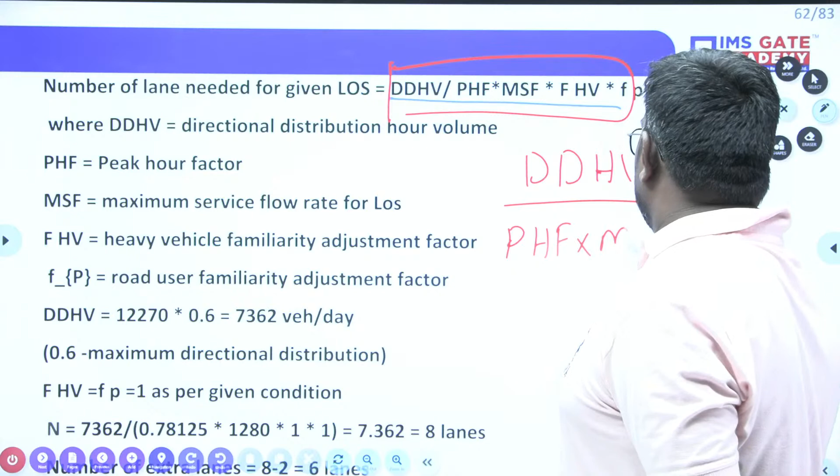Now, he is asking what is the number of lanes to be given. Here we have a formula, my dear students. The formula is DDHV upon PHF into MSF into FHV into FP. I have written those values clearly too, don't worry.

Now, what is DDHV? First of all, directional distribution hourly volume. What is PHF? Peak hour factor. What is MSF? Maximum service flow rate.

And what is FHV? Heavy vehicle familiarity adjustment factor, meaning due to heavy vehicles there should be some adjustment. Is it clear? Now, FP is the road user familiarity adjustment factor. One is heavy vehicle adjustment factor and the other is road user adjustment factor. So FHV is the heavy vehicle distribution familiar adjustment factor, and MSF is the maximum service flow rate.

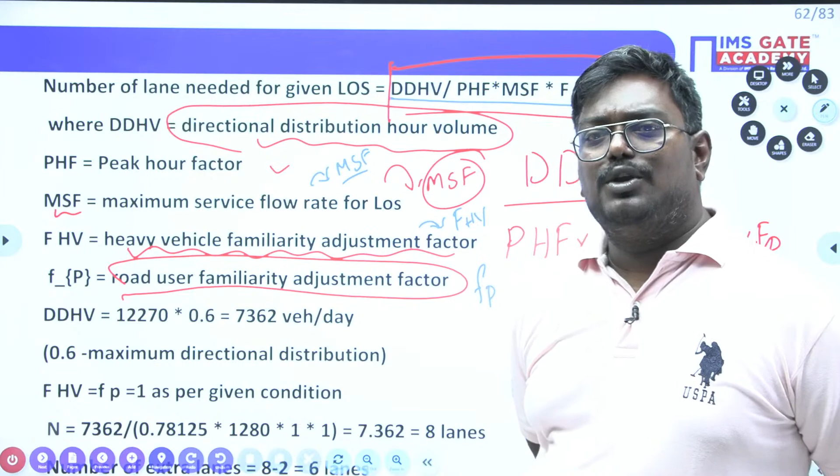DDHV is directional, you can say directional distribution hourly volume. So you know everything, my dear students.

See here why I have multiplied with 0.6. He has given clearly in the problem that the split is given in 60-40 ratio. So whenever there is a split given, you have to multiply with 0.6. In the question it was given as 12,270 vehicles per day. If you multiply with 0.6, you will get 7362.

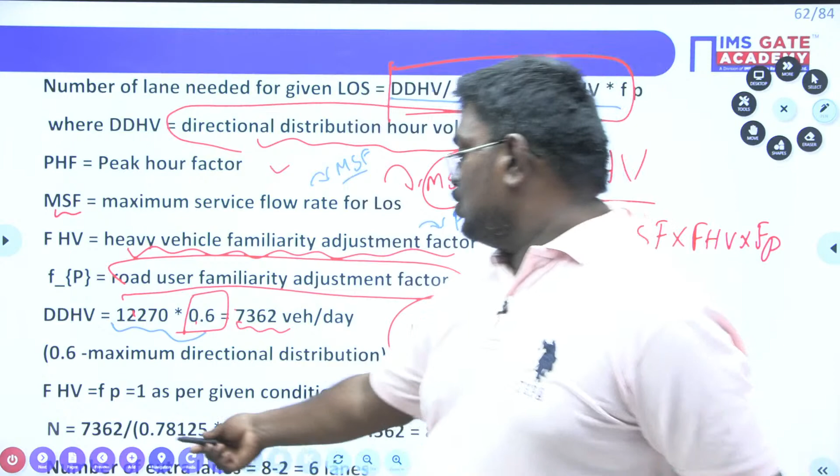So we have given everything. Here it is simple. What I would like to tell you is directional distribution hourly volume is multiplied with 0.6, you will get 7362, multiplied by 0.78125, or this is nothing but the multiple.

What is 0.78125, my dear students? What is heavy vehicle familiarity adjustment factor, and road user familiarity adjustment factor? By applying those things and applying this formula, you will get 7.362 lanes.

But remember, my dear students, he is asking what is the number of lanes. If you calculate, you will get some 7.3. So it should be rounded off to the next lanes, so the number of lanes is 8 lanes.

But he is asking what is the extra number. Most of the students who have done the GATE exam, they have done this wrong. Up to here everyone has done the problem correctly, but here I would thank Vipin sir and Nikhil sir. What I would like to tell you is, when I provide the extra number, the total number of lanes here is 8, minus 2, you can say it is 6 lanes.

Because 2 lanes are already provided. My dear students, you feel these things are very simple, but everyone will write the answer 8 if there is an option, because he used the word extra. Extra means already 2 lanes are there. So when I say the extra number of lanes, it is 8 minus 2, that will be equal to 6 lanes. Is this clear, my dear students?

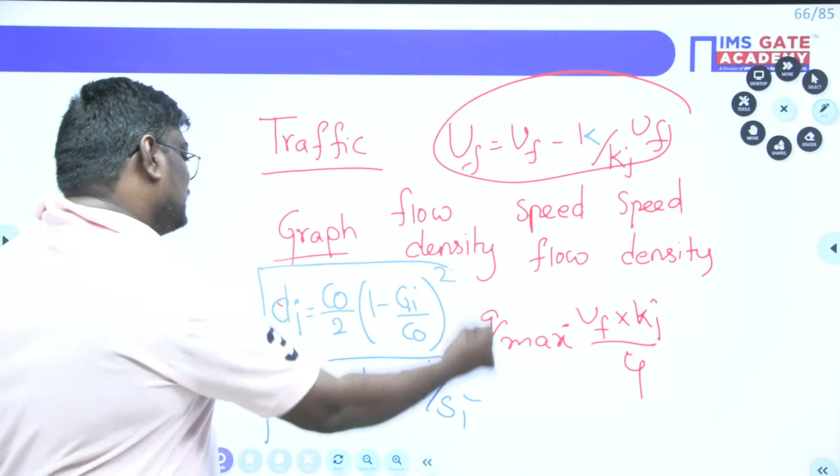Apart from this, when I talk about railway, this is very important. As I told you, for cant they usually ask you 127 R.

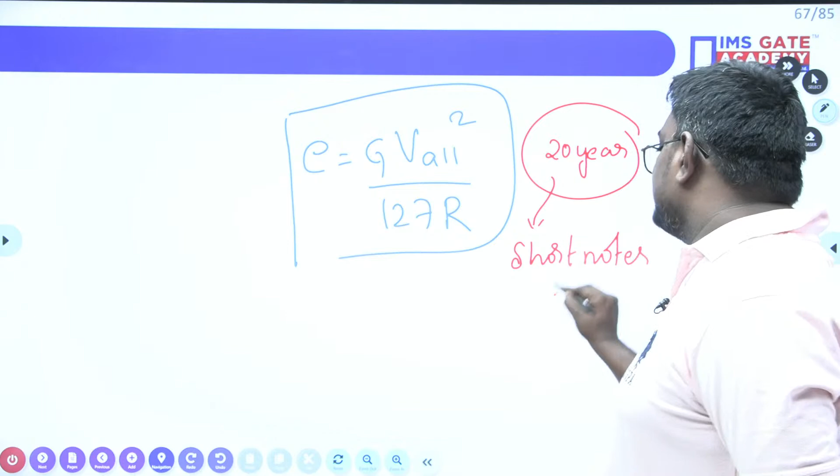So remember, my dear students, whenever you are preparing transportation, don't just solve previous 20 years questions—you have to prepare your short notes and come up with formulas. You have to remember the formulas, because there are a lot of them, and if you can remember some formulas, you can save time also. This is how you can get marks.

In this year, I am expecting almost 6 to 8, minimum 8 marks. This is my wild guess, my dear students. For geometric design, I am expecting 4 marks. Traffic, you will get either 4 marks, or 2 marks here and 2 marks here. But you will also get marks from flexible pavement, railways, or airport—from all these things, another 2 marks. So this is what I would like to emphasize on GATE.

Remember, my dear students, if you are really an aspirant of GATE, my sincere request to all of you is please read all the previous 20 years questions and prepare your short notes. And if you feel they are difficult, make those notes your WhatsApp status, or your screensaver, or stick them to your room wall. That way, if you look at them daily, you will definitely improve.

I hope you have enjoyed the session related to transportation, and I'm really excited to see you coming with good colors after seeing my videos related to transportation.